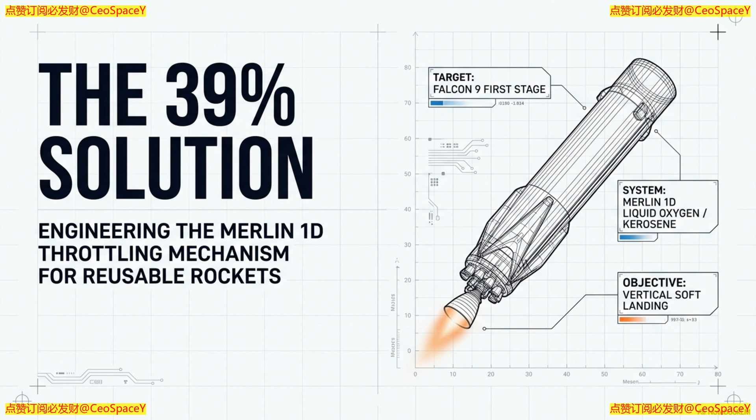So welcome to this deep dive. Our mission today is to unpack the mind-bending physics and software that makes SpaceX's Falcon 9 rocket landings possible. To do this, we are drawing from a highly detailed technical paper dated June 28th, 2026, titled Merlin Engine Thrust Regulation Mechanism. The authors really get under the hood of the Merlin 1D engine.

They move past the whole spectacle of the landing to explain the specific mechanical and computational hurdles of actually surviving that descent. So why should you care? Because if you have ever been amazed by those landings, this deep dive is going to shortcut all the heavy math to give you the ultimate aha moments about how this actually works. We are going to see exactly how you control a continuous explosion well enough to parallel park it. So, let's unpack this.

Before we can even talk about the brilliant mechanical solutions, we have to establish why throttling a liquid-fueled rocket engine is such a nightmare for aerospace engineers in the first place.

We have to start with the fundamental physical constraint here, which is the weight problem. A rocket's mass drops dramatically as it burns fuel. When the first stage of the Falcon 9 separates from the second stage, it weighs about 22 tons. But by the time it reaches the ground for landing, it has burned through so much propellant that it only weighs about 10 tons. So it loses more than half its mass just on the way down?

Yeah, exactly. And to manage that descent, the Merlin engine has to execute 3 very specific burns, and each one has completely different thrust requirements based on that changing weight, because 22 tons falls very differently than 10 tons.

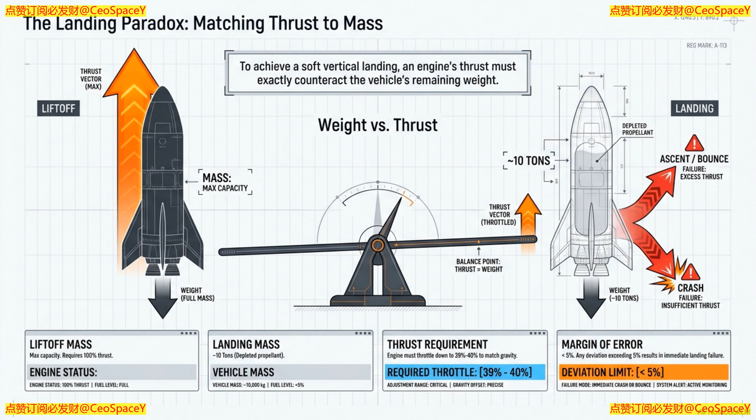So the first is the boost back burn. This happens right after separation. The rocket needs to brake and literally turn itself around to head back to the landing site. At this point it is still really heavy, so it needs 100% thrust—about 845 kilonewtons of force. To give you a sense of scale, that's roughly 190,000 pounds of thrust.

That is significantly more powerful than a single engine on a Boeing 777. You are unleashing commercial airliner levels of power just to slam on the brakes in a vacuum. Yeah, it's a massive amount of force.

Then comes the second burn, the re-entry burn. The rocket is hitting the thicker parts of Earth's atmosphere, and it needs to slow down so it doesn't just burn up from friction. For this, the engine needs to throttle down to about 50 to 60% of its maximum thrust, outputting roughly 420 to 500 kilonewtons. So we're dialing it back because the rocket is getting lighter, and the atmosphere itself is doing some of the braking work for us at that point.

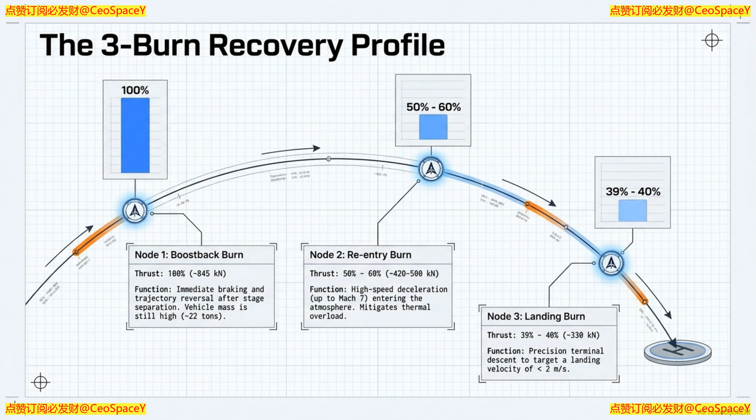Precisely. Which brings us to the final stage, the third burn, or the landing burn. By now the rocket is nearly empty, sitting at that 10-ton mark. To achieve a soft touchdown, the thrust must match the rocket's remaining weight with near-perfect precision. That requires the engine to throttle down to exactly 39 to 40% of its maximum thrust, about 330 kilonewtons. It sounds like driving a massive 18-wheeler that suddenly sheds its trailer and turns into a lightweight passenger car while going down a highway, but you still have to use the truck's massive diesel engine to park it.

That is a surprisingly accurate way to picture it, actually. Now, if you are driving a high-performance sports car and you just starve the engine of fuel at high RPMs to slow down, it stalls and sputters out. I'm guessing a rocket engine doing that is a bit more catastrophic. Why is it so hard to just restrict the fuel flow?

Well, what's fascinating is that a rocket engine is this finely tuned, incredibly fragile ecosystem of pressure. If you just reduce the flow of liquid oxygen and kerosene, you completely ruin the pressure dynamics inside the combustion chamber. So it's not just about less fuel equaling less fire. Right. When the pressure drops too low, you trigger combustion instability. The fuel stops vaporizing into a fine mist. Instead, it pools or burns unevenly, and the flame starts vibrating violently. And those acoustic vibrations can literally shake the engine apart in milliseconds.

Wow, okay. So you can't just trickle the fuel in. It has to be atomized and sprayed with immense force, regardless of whether you are at 100% power or 39% power. Exactly. And the stakes during that final landing burn are astronomically high. The paper actually notes that if the thrust misses the rocket's actual weight by more than 5%, it crashes. It either slams into the concrete or it accidentally starts flying back up into the air, runs out of fuel, and then drops.

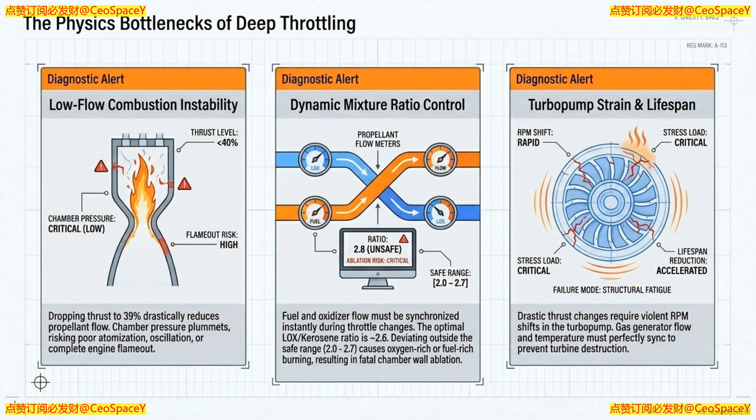Yeah, there's zero room for error. And beyond just the raw force, there's the delicate chemistry of the explosion itself. You have to maintain a vital mixing ratio between the liquid oxygen and the kerosene. The optimal ratio is 2.6 parts liquid oxygen to 1 part kerosene. The safe operating range is between 2.0 and 2.7. So the actual recipe for the explosion has to stay within that incredibly narrow window while the total volume of fuel is dropping by 60%.

Exactly. If your flow rates get sloppy when you throttle down and you drift outside that ratio, you are in immediate danger. If the ratio goes too high, meaning too much oxygen, you get an oxygen-rich fire. Under high pressure, superheated oxygen acts like a cutting torch. Oh, wow, so it just burns the engine. Yeah, it will literally melt and burn right through the metal walls of the engine in seconds. If the ratio drops too low, it runs fuel-rich. That is safer for the metal, but it creates massive amounts of soot and instability, which drops your thrust unpredictably.

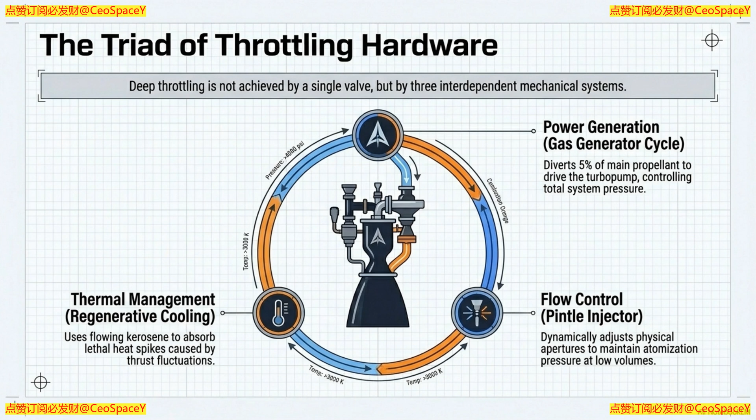Okay, here's where it gets really interesting, because when I was reading the section on how SpaceX solved this, I couldn't believe they basically pulled a piece of Apollo-era technology out of the archives. Oh, yeah, it's such a cool detail. Because you can't just starve the engine without melting it or vibrating it to pieces. They couldn't use traditional rocket engine showerhead designs. Right, so they revived the pintle injector. It was originally used on the Apollo lunar module's descent engine, the very engine that allowed Neil Armstrong and Buzz Aldrin to hover and throttle down before touching the lunar surface.

Which is wild to think about, because a traditional injector is basically a showerhead with fixed holes, right? If you turn down the pressure, the fluid just weakly dribbles out. But this pintle injector is totally different. Completely different. The paper describes a 3D printed central post that sticks right into the combustion chamber. The liquid oxygen shoots straight down the middle of this post axially. And then the kerosene shoots out the sides of the post radially. They collide at a 90-degree angle right at the tip.

And the genius part is the mechanical sleeve that moves up and down over that post. When the flight computer demands a reduction in thrust, they don't just reduce the fuel flow, they physically move that sleeve to shrink the size of the gaps the fuel is spraying out of. Oh, it's exactly like putting your thumb over the end of a garden hose. Exactly. If you turn down the faucet at the house, the water volume drops and the stream goes limp. But if you press your thumb over the nozzle, you restrict the opening, and suddenly that tiny bit of water is spraying out at high pressure again. Right, it atomizes into a fine mist. That is the perfect analogy. By changing the physical flow area, the pintle injector keeps the pressure drop stable. The engine targets a 20% pressure drop across the injector no matter what the thrust level is.

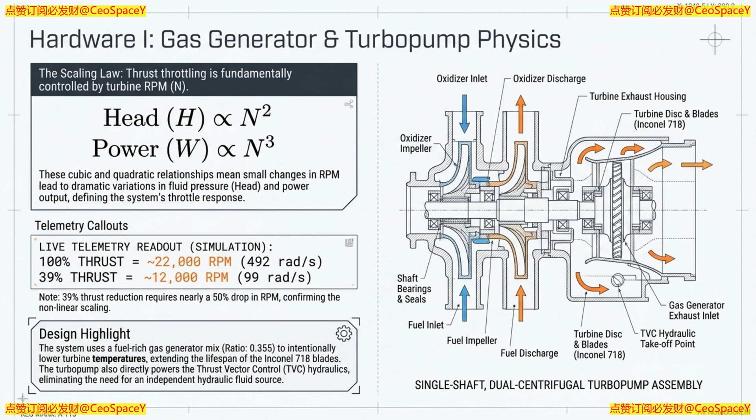The pressure stays consistently high at the point of injection, so the fuel and oxygen atomize perfectly into a highly combustible mist. It completely avoids the combustion instability we talked about, even when the engine is running way down at 39% power. That is just brilliant hardware design.

But creating a stable explosion is only half the battle. We also mentioned that running an engine like this can literally melt the combustion chamber walls. I found the thermal management section of this paper absolutely wild. They are using highly flammable jet fuel to cool down an incredibly hot engine. It sounds like a paradox.

It is a technique called regenerative cooling, and it's a phenomenal hardware hack. Before the kerosene is ever injected into the combustion chamber to be burned, it is pumped through a network of tiny pipes built directly into the walls of the combustion chamber and the nozzle. So as the engine burns and generates massive heat, that heat transfers into the metal walls, and the cold kerosene flowing through those tiny pipes absorbs the heat, cooling the metal down to safe temperatures.

And as a thermodynamic bonus, the kerosene gets preheated before it enters the chamber, which makes it vaporize and burn even more efficiently when it hits the pintle injector. It's a win-win. But cooling the main chamber isn't even the hardest part, is it? There's a massive thermal challenge with the turbopump. Oh, the turbopump is a nightmare to manage.

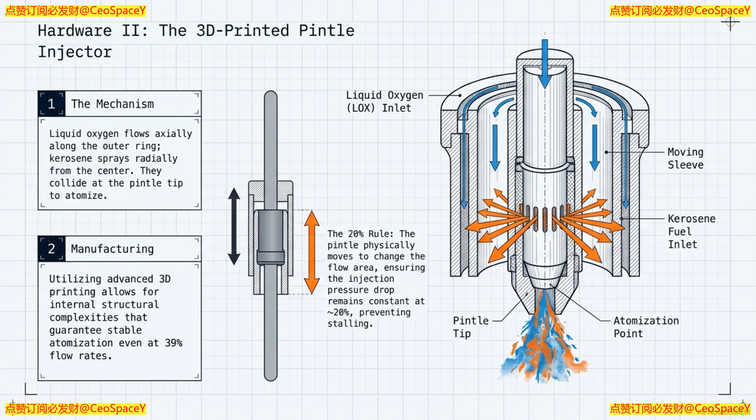It is the mechanical heart of the engine. It forces the fuel and oxygen into the chamber at insane pressures. During that first boost-back burn, the turbopump is screaming at 22,000 revolutions per minute. Yeah, but for the landing burn, it has to aggressively shed momentum, dropping down to about 12,000 RPM. And the turbine blades inside this pump are made of a super strong nickel alloy called Inconel 718.

But even Inconel will melt if it gets too hot while it's spooling down. To power this pump, they have a smaller, separate combustion chamber called a gas generator. And the way they keep the pump from melting is completely counterintuitive. They intentionally run this gas generator incredibly fuel-rich, with a mixture ratio of just 0.355.

So way below that 2.7 optimal ratio, drastically below it. All that extra unburned kerosene isn't there to combust, it's there to absorb heat. By flooding the gas generator with excess fuel, they drastically lower the temperature of the exhaust gases that hit those delicate turbine blades. They happily sacrifice a little bit of fuel efficiency just to ensure the turbopump doesn't melt into slag during the landing sequence.

Okay, so we have a shape-shifting Apollo showerhead and fuel that acts like antifreeze. But having an engine that physically can adjust its pressure doesn't mean anything if it can't adjust fast enough, like a falling 22-ton object doesn't afford you time. If a sensor detects a wind gust or a pressure drop, how does the engine react before it crashes?

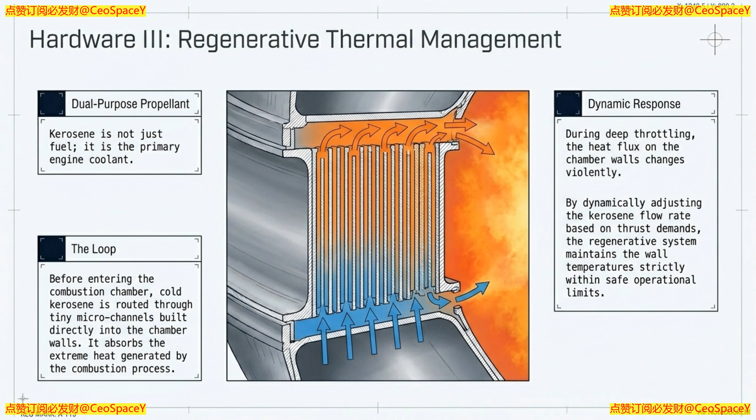That is handled by a deeply integrated three-layer control architecture. The top layer is the central flight computer up in the rocket itself. Its job is trajectory planning, figuring out where the rocket is in the sky, factoring in wind shear, and locating the landing pad. So that's the big picture brain.

Then there is the middle layer, the engine control unit, or ECU, located right next to every single engine. It takes the broad directions from the central computer and translates them into specific commands for thrust and the fuel-to-oxygen mixing ratio. And finally, the bottom layer consists of the physical actuators, the massive hydraulic valves that actually move the sleeves and control the fluid flow.

The source material points out a fascinating detail about those hydraulic valves. They aren't powered by some separate hydraulic system that could leak or fail during the violent shaking of re-entry. This is one of my favorite details. The hydraulic pressure needed to open and close these massive valves is provided directly by the high-pressure fuel coming off the turbopump itself, which is so clever.

They eliminated the need for a separate, failure-prone hydraulic fluid system entirely. If the pump is spinning, you have control pressure. The engine essentially uses its own lifeblood to move its muscles. I am trying to wrap my head around the sheer scale of the math involved here. The rocket is constantly getting lighter, the wind is blowing, the atmosphere is changing density.

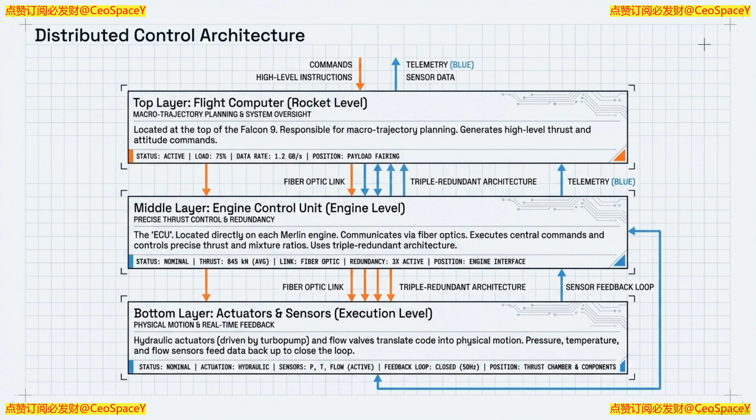Yet the source says the landing thrust is controlled to an accuracy of 0.5%. To hit that precision and ensure the rocket touches down at a speed of under 2 meters per second, the paper mentions high-frequency PID controllers. Before we move on, what exactly is a PID controller doing in this context?

Okay, so PID stands for Proportional Integral Derivative. It is a control loop feedback mechanism. Think of it as the ultimate micromanager for the engine's valves.

So if I'm driving a car on the highway, the proportional part would be seeing I'm drifting out of the lane and steering back. The integral part is realizing my wheel alignment is slightly off, so I consistently have to pull the wheel a bit to the left. And the derivative part is seeing a sharp curve coming up and preemptively steering into it based on how fast I'm approaching. Is that close?

That analogy translates perfectly to fluid dynamics, actually. The PID controllers are dynamically adjusting the valves thousands of times a second to make sure that 20% pressure drop across the pintle injector is maintained, and that the oxygen-to-fuel ratio shifts smoothly from 2.0 early in the burn to that near-perfect 2.7 right at landing.

So it's constantly correcting itself. Yes. They're looking at the current error, the historical error, and the predicted rate of change all at once.

But the PID controllers are just the micromanagers. The paper also highlights model predictive control, or MPC, running alongside them. And it mentions quadratic programming equations. I haven't taken calculus in a long time. What is this math actually doing up there in the air?

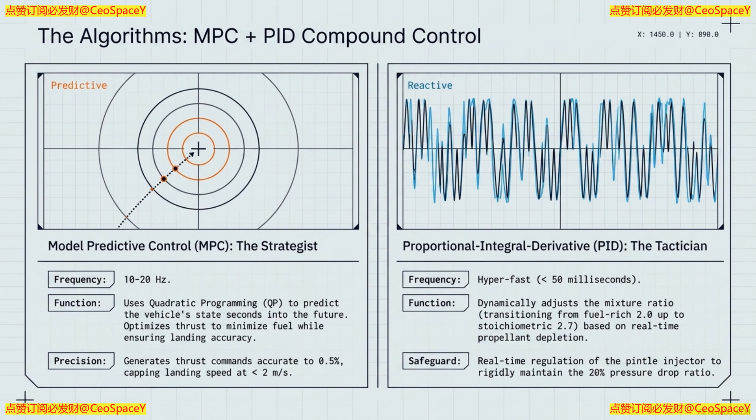So while the PID controllers manage the immediate physical hardware, the MPC is the macro manager. What's fascinating here is that MPC doesn't just react to what the rocket is doing right now. It is constantly predicting the future over a specific time horizon. Literally, 10 to 20 times every single second, the MPC algorithm calculates the rocket's current speed, weight, and trajectory.

And then it simulates the next several seconds of flight. It's basically playing a video game simulation of the landing, seeing the future, making a decision, and then doing it all over again a fraction of a second later. That's exactly it. Yeah.

And that is where the quadratic programming comes in. It's an optimization problem. The MPC has to balance competing costs. Like, it wants to hit the ground at zero velocity, but it also has to ensure it doesn't run out of fuel while doing it, and it has to stay within the physical stress limits of the vehicle. So it can't just slam the brakes so hard the rocket snaps in half.

Right. The quadratic equations plot a theoretical curve that satisfies all those constraints. It essentially asks, if I apply this exact thrust curve right now, where will the rocket be 3 seconds from now? It finds the perfect command, executes it, and recalculates the whole thing 50 milliseconds later.

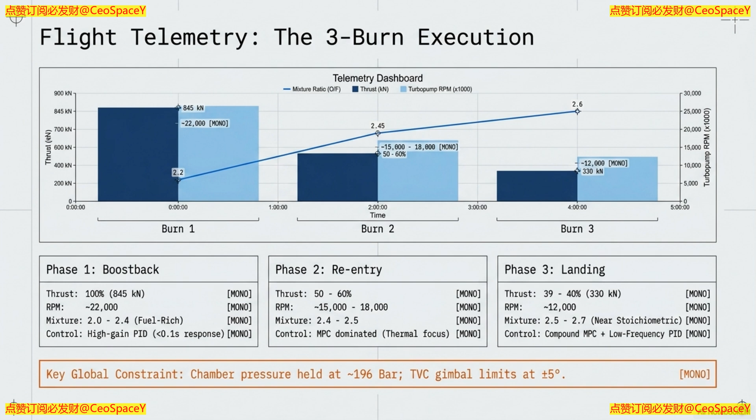To really understand why this computational speed matters, the source material brings in some context about a different rocket, the Zhuque-3, which suffered a landing failure. What happened there? Yeah, the Zhuque-3 failure perfectly highlights the razor's edge these systems operate on. According to the data, the Zhuque-3 failed because its engine valves had a response delay of just 0.3 seconds.

Wait, 0.3 seconds? That is less time than it takes to blink your eyes. Exactly. But in the context of a falling rocket, that 0.3-second delay between the software sending a command and the physical valve actually moving caused an 18% imbalance in thrust. Oh my God. Yeah. The software knew what it wanted to do, but the hardware couldn't physically move fast enough to execute the command. The rocket lost control.

By contrast, SpaceX demands a system-wide response time of under 0.05 seconds. That is 50 milliseconds. How do you even develop software that reliable? I mean, you can't just write quadratic programming code on a whiteboard and hope it maps perfectly to real-world fluid dynamics on the first try, right?

You absolutely can't. And that is why SpaceX employs a philosophy they call flight as test. Traditional aerospace treats a crash as a catastrophic failure, like a reason to halt programs for years. SpaceX treats a crash during a test campaign as the fastest possible way to parameterize their PID and MPC controller.

Well, these are gathering data. Tons of it. Every single Falcon 9 flight is carrying over 2,000 sensors. They are constantly measuring pressure, temperature, vibration, and valve positions in real time.

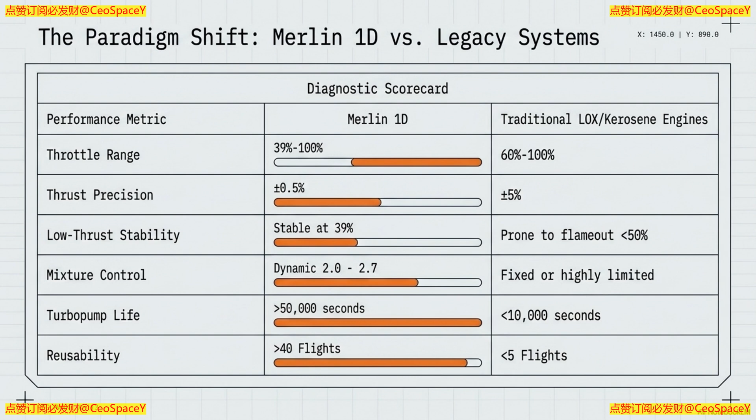So every launch, even the routine commercial ones deploying satellites, is secretly a massive data gathering mission. They didn't just build a better engine, they built a flying software iteration lab. That's a great way to put it. They take all the data from those 2,000 sensors, feed it back into their algorithms, and refine their predictive models.

They find out exactly how the engine behaves in the real world under real atmospheric conditions, like when a valve sticks for a millisecond or the fuel sloshes unexpectedly. And then they just update the software for the next flight.

So what does this all mean? When you take this incredibly robust hardware, the Apollo-era pintle injectors, the fuel-cooled walls, the hydraulic valves powered by turbopumps, and you marry it to this predictive 50-millisecond MPC software loop, what is the actual bottom-line payoff compared to the rest of the industry?

Well, the payoff is a set of performance statistics that completely rewrite the rulebook for liquid oxygen and kerosene engines. If you look at a traditional expendable engine of this type, it can only throttle down to about 60% of its maximum power safely. Its thrust accuracy has about a 5% margin of error, and even the most robust ones are designed to be fired maybe 5 times in their entire lifespan. Right. They were literally designed to throw themselves into the ocean.

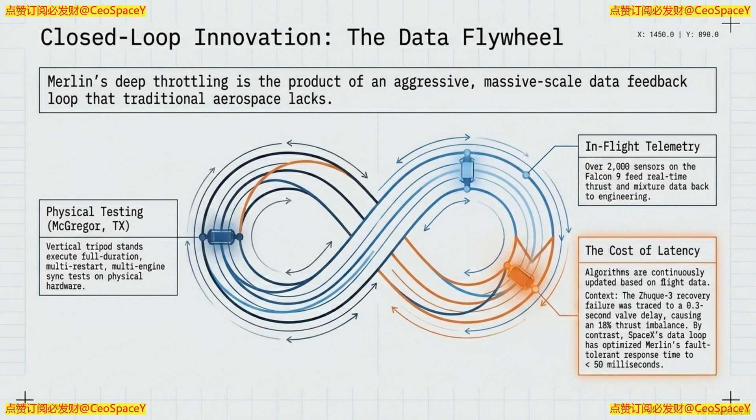Exactly. Now look at the Merlin 1D. It throttles down to 39% without combustion instability. It has a thrust error margin of just 0.5%. It boasts a staggering 98% successful recovery rate over hundreds of launches. And a single engine can be reused over 40 times.

Over 40 times. That durability just transforms the entire economics of spaceflight. We are no longer throwing away the airplane after a single flight. Exactly. But it makes me wonder, if they are already hitting a 98% success rate, what could possibly be left to improve? The paper actually outlines the next frontier for thrust regulation, doesn't it?

Oh yeah, the engineers are far from finished. They're looking at integrating machine learning directly into the adaptive control systems. Instead of just reacting based on pre-programmed physics models in the MPC, the engine could use AI to dynamically adjust its own fuel mixture based on minute, real-time changes in vibration and combustion pressure. So the engine essentially learns how to run smoother while it's falling.

Yes. They're also looking to widen the thrust range even further, pushing for stable combustion at even lower percentages. And mechanically, they plan to expand the engine's thrust vectoring capabilities. The steering, basically. Right now, the physical gimbaling, the tilting of the engine nozzle to steer the rocket, can deflect about plus or minus 5 degrees. The paper notes they want to push that to plus or minus 10 degrees.

And the 10-degree tilt would give the rocket wildly more maneuverability to fight high crosswinds or land on a pitching drone ship in rough seas. It provides a much larger control margin for the flight computer to work with. Precisely. It just adds another layer of adaptability.

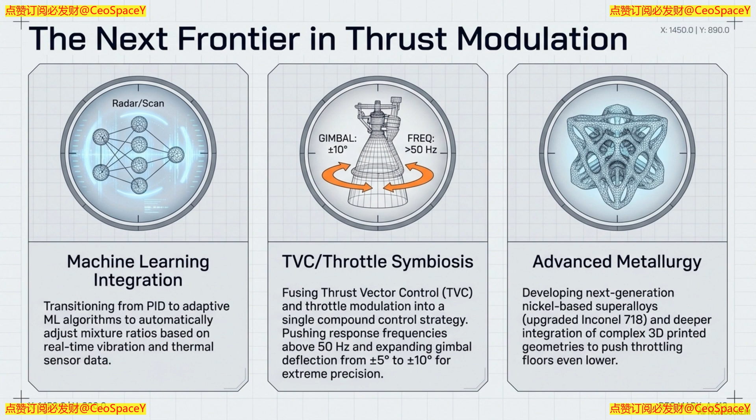We really have gone on an aha journey today. We started with the visual we all know, a massive tube of metal floating down from the sky, resting on a pillar of flame. But now we know it is not just falling, it is a self-cooling, continuously recalculating machine.

It is pumping its own fuel through its walls to avoid melting, it's shifting physical sleeves inside its injector to keep the pressure perfect, and it is predicting its own future 20 times every single second to adjust that fiery breath. It's a stunning symphony of mechanics and mathematics. The software and the hardware are so deeply integrated that they function almost like a biological nervous system reacting to its environment.

The next time you watch a commercial space launch, you're going to see past the smoke and fire. You are going to recognize the millisecond ballet of turbopumps, pintle injectors, and PID controllers, keeping that vehicle perfectly balanced.